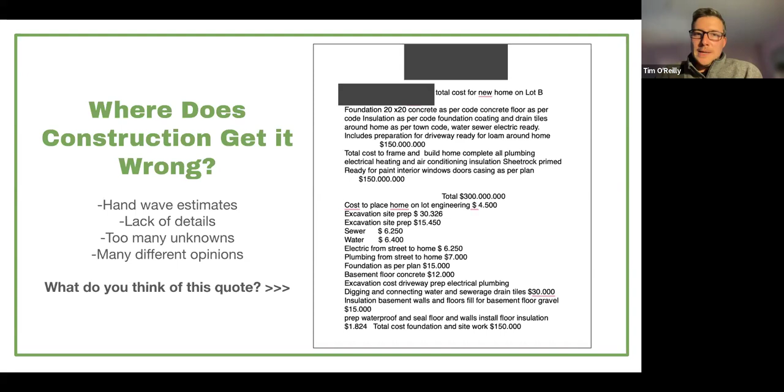So our goal overall is to correct some of these wrongs, to have our team come out and do a site visit, our engineering team reviews it, our design team reviews it, and we lean on our experience of building close to 50 homes at this point, to get you a report with detailed information you can use to go out there with confidence and figure out if an ADU or small home build is right for you. Yeah, and it's not only that, but it's catered to each individual parcel of land - wherever it is you're looking to build, whatever it is you're looking to do, we cater these things to you. So exactly.

That's what's hard - you can know that ADUs are possible in your town, but that's missing the construction piece for your specific lot, your infrastructure, and your constraints of where you are and where you want that project to be. So that's our goal here, is to get you that quality information up front so you can make informed decisions.

We tell Jeff and I say this all the time: you're spending $600 on a feasibility study, and it's not binding. Our goal is that unbiased information, so you can take that to any construction professional and be informed about your property and have the path forward. It really does help you identify next steps.

So many different moving parts, so many different professionals involved in the construction project, but you'll be armed with the information to know how do I move forward, and maybe what are some unknowns I still need to tackle. You could basically move forward with that intel.

Jeff, you were saying you just had someone come back from July - they had their feasibility done in July, and now they're ready. Yep, that's another thing we're hoping to offer here - you get us on site, you get our team to review it. But whether you're ready to move right now, in 6 months, or in 24 months, that feasibility doesn't really expire as long as the utilities, infrastructure, and things remain the same.

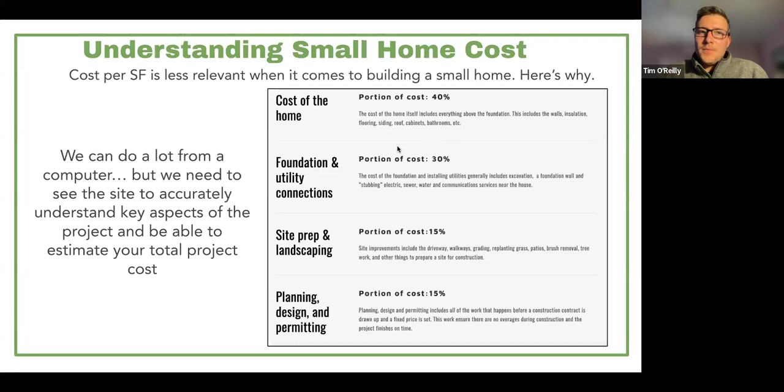We're doing a lot of work down on Cape Cod, so when we're thinking about utilities, it's often a septic, and that's going to cost a little more than maybe an in-town lot with town sewer. Likewise, some towns require more planning and permitting, which is more time consuming. They need additional documentation, which might be more expensive. You might be out in the sticks a bit, so you have more site prep and landscaping. All those pieces can vary, but generally we need to get our eyes on site to hone in and get better information there.

So earlier we said this is a 3-part process. The first part is before we even come out to the site, and that involves a lot of background research with our civil team and working with your small home advisor. Jeff and I do this all the time—we hear about people's goals and visions, their budget, what they're hoping to accomplish, and that helps us steer the conversation to start figuring out all these unknowns.

Jeff and I will go back and look at your specific address to figure out your zoning district and the exact rules for your property, governing setbacks, lot size, lot coverage. I could go on and on, but there's a lot of rules specific to your zoning district that we want to find out to give you good information.

We're then going to do a GIS map review. Every municipality—I pulled up a couple different brokers for those GIS maps—but we'd search your town and whatever GIS platform they use. We're going to see what kind of data is out there on your property, including any overlay districts or other relevant zoning, special wildlife corridors, or floodplains, anything we'd want to know and wrap our heads around before coming out to do a site visit.

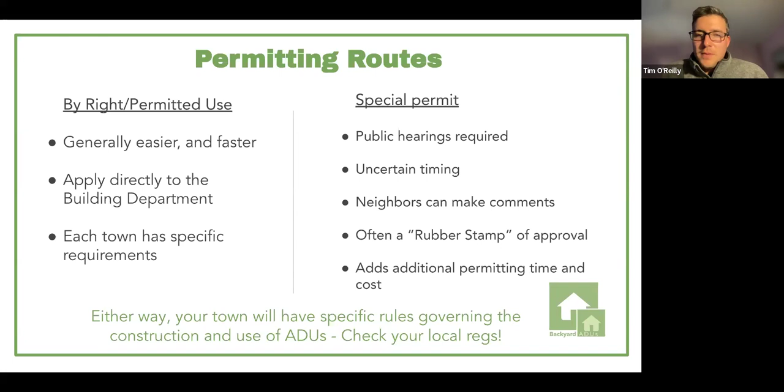But within that, something we need to identify upfront is whether there's any additional permitting that might be needed. We're doing a lot of work on Cape Cod, and we encountered an overlay district, or a few overlay districts, when we were looking at someone's property.

So they were dealing with, off the top of my head, I can't remember if this was the coastal ponds overlay, the wildlife corridors, or the wellhead protection districts. But it was important to know exactly where your property is here in Falmouth, because there might be additional permitting or rules to follow. These often pertain to septic, sometimes wells, but oftentimes open space as well. So we need to wrap our heads around as much as we can before we come out, so when we're on site assessing your property, we have all this information downloaded to get you good, accurate information.

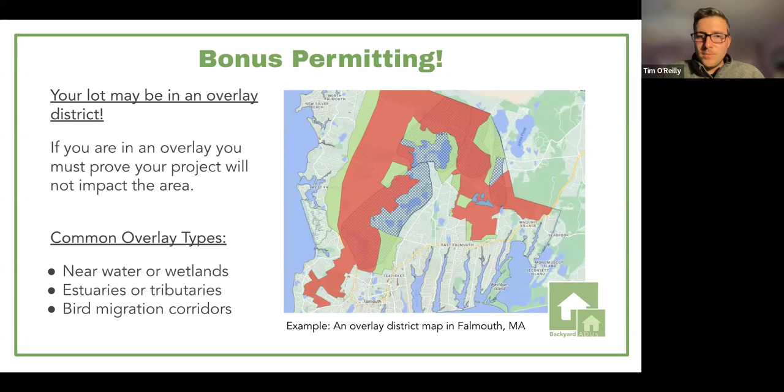So the site visit - part 2 is actually coming out to site. Jeff or myself will bring a car full of tools. We'll have the transit, a laser transit to shoot any grade differential. We're thinking in the back of our heads, what do we need to do for foundation work? Is it a flat lot? Is there a grade drop? Do we need to add more foundation material to make sure we have a nice level home?

What we're doing during this site visit is taking note of any existing structures or natural features - whether that be ledge, trees, or other natural factors to be involved with costing and the total project scope, as well as this one, they were thinking about doing an attachment. So what that attachment detail might be to the existing house. Some municipalities allow attached or detached. In Maine, after LD 2003 goes through, you should be allowed to do either.

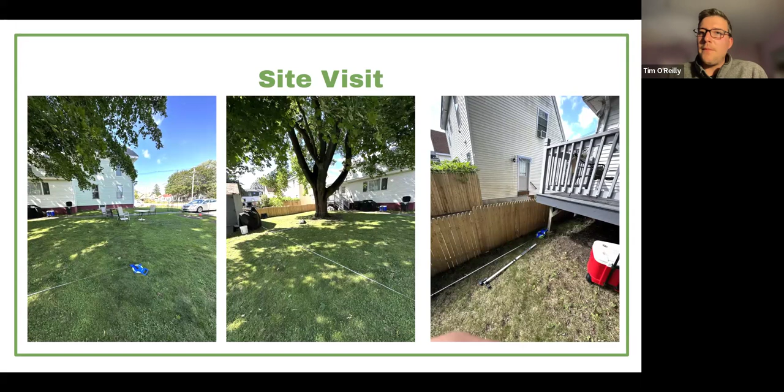Part of those requirements to meet a building permit is how are you getting this thing hooked up - water, sewer, electrical. Jeff and I are always looking out for this to see how it's going to work. So I alluded to it earlier, sewer and septic - we're thinking about that grade differential. Can we gravity feed from the new structure to whatever infrastructure is there? If you're on septic, what's your capacity - both the tank and the leaching field? How old is that system? We're doing brand new construction here, so we don't want to hook up to something that's going to have problems down the road if it can't handle that new construction.

And then especially in coastal areas where there's sensitive ecosystems, we see a lot of that on Cape Cod - are there any requirements for nitrogen reduction? We could have a whole series on this, and there are some great resources out there. So if this is something you're interested in, let me know - there are questions pertaining to this.

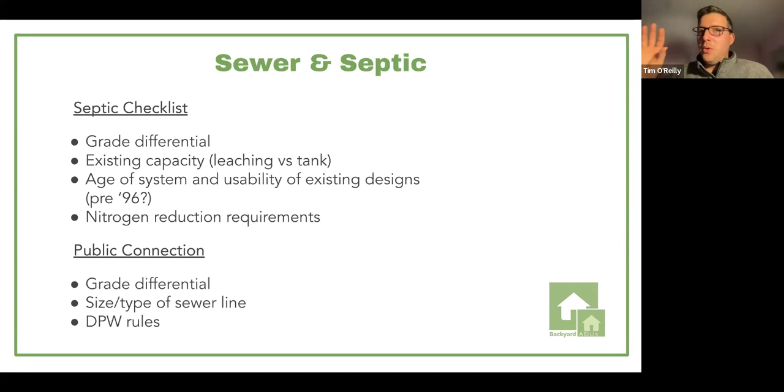Similarly with septic or town sewer, what's your grade differential? Where is that line, and what is it made out of? Cast iron, PVC, and how big is it? There are certain requirements we need to meet for plumbing code. And it'll really come down to what are the DPW's rules, how and where can that connection happen. So that's what we like to figure out on site, and then punch that into your report with any cost implications and how that connection is going to happen.

So we identified this at the feasibility study level. We said, hey, the feasibility of the ADU is possible. It is feasible, but you're going to need a new septic. Let's earmark a chunk of change, knowing that when you're thinking holistically about the whole project, you're going to need this piece of infrastructure.

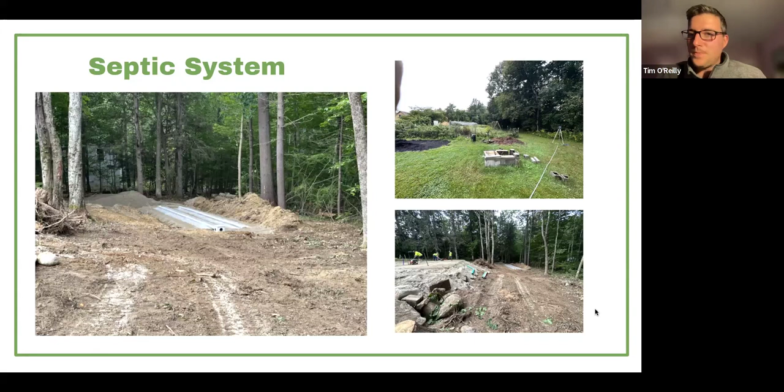Will you always need a separate septic?

Say that 10 times fast. The short answer is no, not always. It really does depend on what's in the ground.

This is a good example. This was a home I visited in Truro, a new build in 2018, and they're looking to add some space for their growing family. So I went in the basement and found their sewer pipe, figured out how deep it is leaving the house and where it's leaving the house. This was 4-inch PVC, so we knew we would have the green light to connect to it.

Then I went out in the yard and figured out, in this case, it was very easy with that snorkel there, where the leach field was. But the tank was near the house, and we made an informed decision for them: hey, this is the best route to connect to. So it's site by site dependent on what's there and what the topography is, to know whether we can connect to what's there or if new infrastructure is needed.

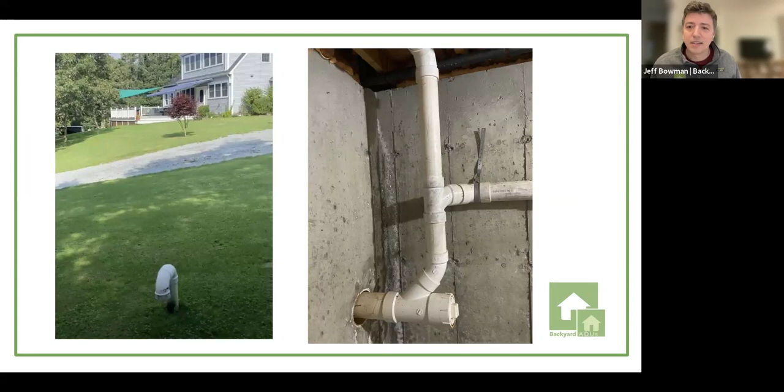To go a little deeper on that, it depends on the existing age of the infrastructure and what the capacity is of the septic. Ideally there are town records, or the property owner has information regarding when and how big the septic was put in, let alone where. But given those circumstances, sometimes we can attach, and often do attach, to an existing septic system. Sometimes it is necessary to put in a new septic system, sometimes it's preferred. Age, capacity, those are usually the big drivers, and proximity.

Here in Massachusetts, all local health agents and departments are beholden to Title V rules and requirements. So it depends on what's there. Are we looking at bedrooms? Are we looking at total number of rooms? What's there, how old is it, how big's the tank, how big's the leach field?

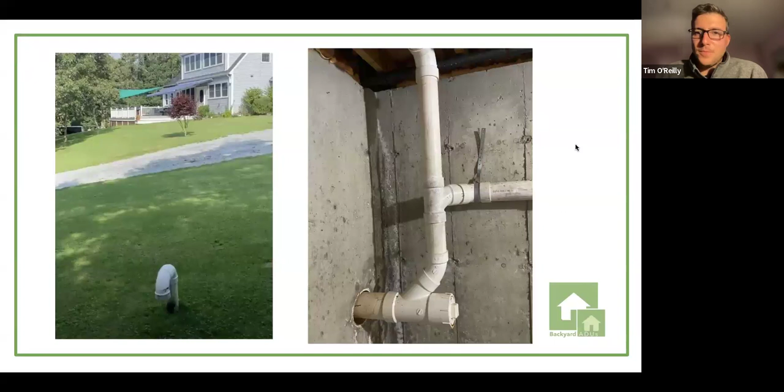As Jeff mentioned, this is about going and finding the records. I can't remember exactly where this one was, somewhere in Brewster. But what are the records? We can see as much as we can on site, in the basement and from the surface, but to figure out what's in the ground we need to go and pull those records and analyze them. So we do that as part of the feasibility. As you'll see in the example report coming up, we combine that with our site visit to see how and where an ADU might go, and that connection.

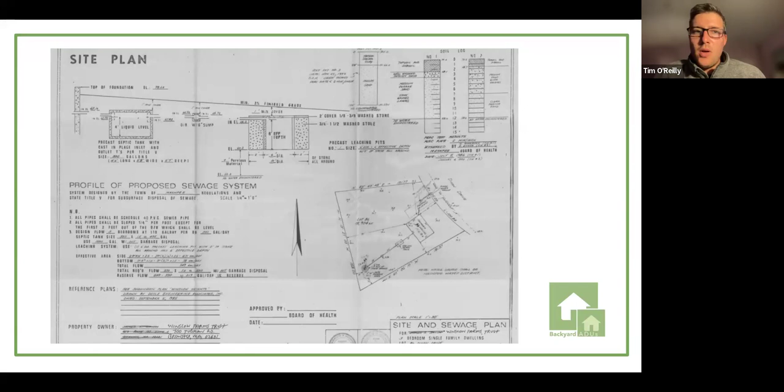Often if you're on a well, you may have a septic system. So we got to think about how far away those are, but also where is our proposed ADU going to be, and then try to figure out any information we can about that well. Oftentimes, if you're lucky, it's written or engraved on the underside of the cap on the head of that well. If you take that off gently, sometimes you can get good information, like this one was telling us the depth, the casing, and the refill rate.

So why is that helpful? We're adding new construction, new plumbing fixtures. We want to try to figure out if we need to add any additional pressure or filtration systems, or can we just connect to what's there and go from there.

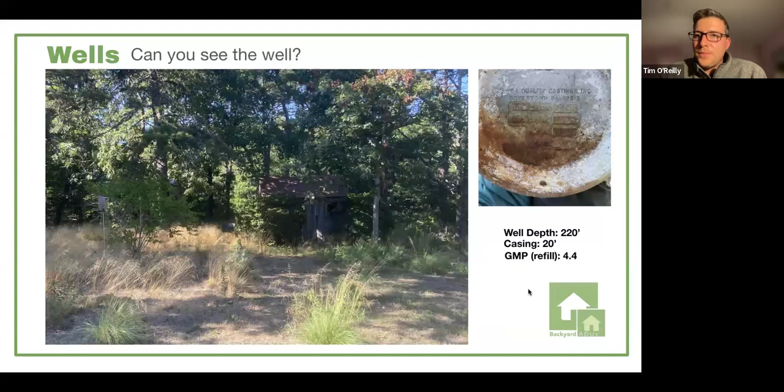If possible, if we're able to connect to the existing well, that's going to generally save on well drilling costs and associated expenses. It's generally going to be a cheaper way to go, to use the current infrastructure that's already there, than putting in new. But sometimes new is called for, and there's some flexibility in between.

I just worked on a project and we consulted with the well company, and we were able to add the ADU to the existing well. We just needed an extra holding tank because of their refill rate - to say, hey, we're going to have an extra, I can't remember if it was 50 gallons or whatever it was, in the main house, to know that we're going to have enough water, enough pressure to serve the ADU, which in this case was another 75 feet away. So it is site by site specific.

Public water - a lot of towns are on public water. So what are we looking for? What is the material from the street to the house before the meter? You can often see it sticking out of your basement. We're trying to figure out, can that service line bring enough water to the main house so that when we hook up to the ADU, we'll be okay.

Similarly, it'll often reduce to the meter. So what is that meter size? You'll see 5/8 meters, sometimes you'll see a 3/4 inch meter. But what's coming out of the ground? How big is your meter? Basically, a good general rule is, if you're bigger than 3/4 inch copper, you should be good to go.

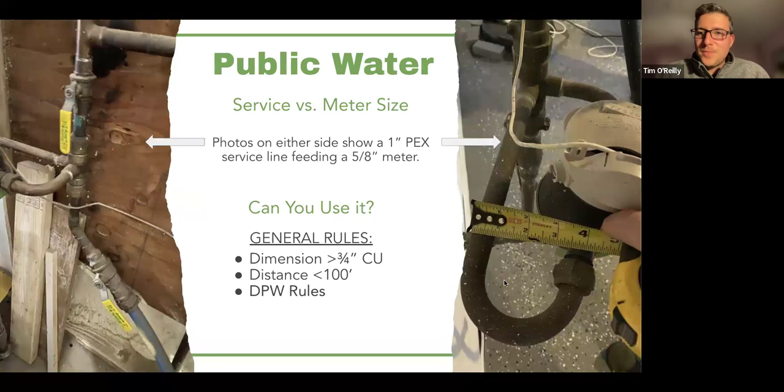All right, the last utility here is electric. We're building all electric homes, so power is a big item. We need to figure out where the power is and how much is there. For our new homes, we're looking for 200 amps - for us, that's the gold standard. We're running heat pumps, electric hot water, electric appliances, not to mention your lights. So we want to make sure we have enough juice for your project.

As part of that feasibility, we need to figure out what's there - how many amps is your current panel, and how are you using that? I was at a feasibility today, and they had a hot tub, a Tesla charger, heat pumps - they were maxed out. We cannot pull any more power from that panel. So as we approach this feasibility study, we're going to make sure that whatever avenue we propose gets enough power to that ADU. So what we're often doing is adding a second service.

So the main house has its service, and we're proposing a secondary service. So we're not touching the existing house, but that's not always the case. In some instances, it might make sense to upgrade the main house, whether that's from 100 to 200 amps, or 200 to 400 amps. There is some nuance there, but ultimately, when we come and do that site visit and have our engineering team review it, we're making sure that there's going to be enough power for the new unit and that we're not going to disrupt the existing house.

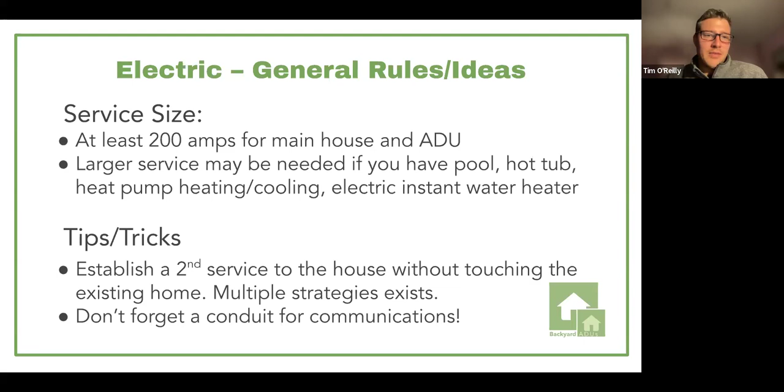Yeah, I see a lot of variation with power, and at least in Maine, there's a lot of different scenarios. I'm going from raw land out in rural Maine to somewhere on Peaks Island, to all over the place. So this is something that we take pretty seriously, and we find out what is there and what the best path forward would be, given your particular circumstance, and it varies quite a bit.

And it's a little bit more tricky depending on who you get your power from. It's not always easy to access the field engineer or the person who's making the call on exactly how that's going to get hooked up. So we've built enough of these now in so many municipalities, dealing with Eversource, CMP, National Grid, or there are a handful of towns, at least here in Massachusetts, that have their own power. But we know the lay of the land and what is possible.

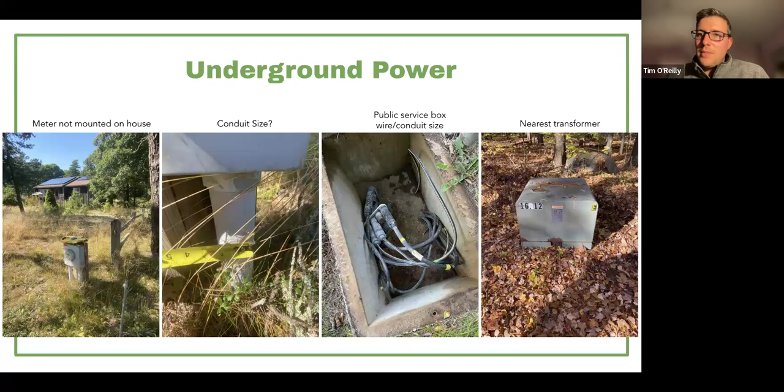So underground power, we see that a lot, especially on Cape. We're trying to figure out where's the meter, how big's the conduit, how big of a wire, how many amps can we run through that conduit. Where is it? Is the transformer right here - that's a source of a lot more power - or is it a public service box? And do we need to upgrade power between a transformer and a box in a house, or just a box in a house? We're trying to get our eyes on everything that's there so we can make an informed decision on how to get power to the ADU.

Part of the overhead connections as well is the site constraints. So since we build modular, we get the housing components shipped in, and then we have a crane, and we have to figure out, part of the feasibility study is also the logistics of how do we balance around what the current existing infrastructure is, and overhead power can often be a pretty large factor in that.

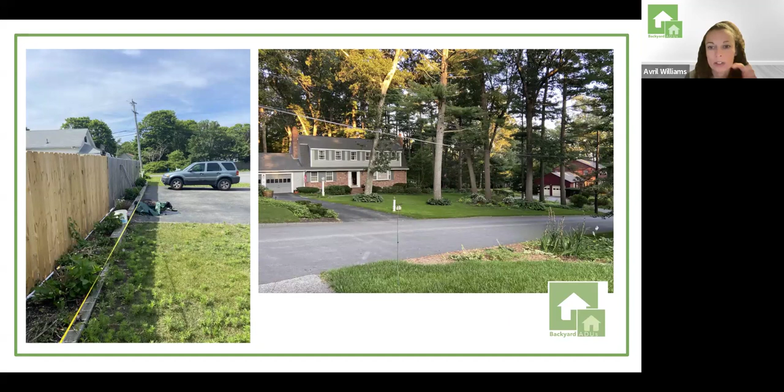So it sounds like, going off the information from the question, one of the follow-ups from a feasibility might be just that - saying, hey, this is the buildable area, we're in your budget, the next step would be let's get the surveyor lined up with the septic designer and take that next step. So that's good for everyone to know too - the feasibility study also includes the next steps to follow if this is something you're wanting to do. It's kind of like the first step that then sends you into the next few steps if you want to follow through. And at each step we're talking about with these utilities, we're trying to capture all the knowns and guide you in the right way. But sometimes there are these other tail pieces that say, hey, this is that nugget of information we need to finalize - let's go do it.

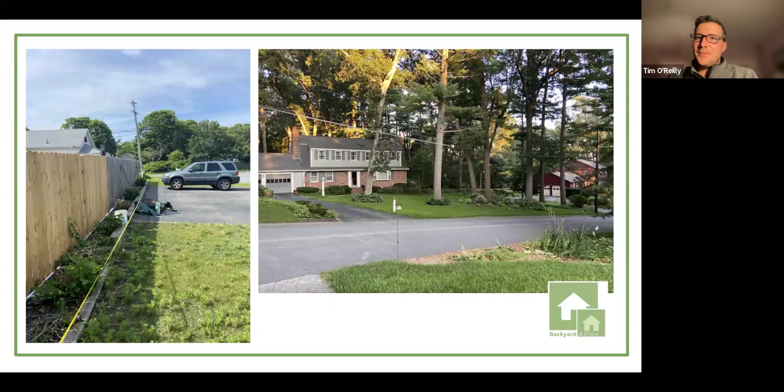And do we ever navigate with someone who's looking to do this on a property they're considering buying but haven't bought yet? Absolutely. I was on the phone last night for close to an hour helping some folks think about where they want to live next and what piece of land to buy. So I would recommend reaching out to me or Jeff, we'll be happy to chat with you.

But in short, you want to find where you want to live first - make sure it's the right town, or near family, or whatever your big parameters are. And then what we do recommend is treat this feasibility like you would a home inspection if you were buying a home, but for that raw land. Let's come out and see what clearing, what site prep, what site access, and about these other utilities - perc tests, well, power - to again give you a ballpark budget for the entire build. You can then also know what the land cost is going to be and see if the two together make sense for your budget and for your goals.

And our other questions are more about what's included that we haven't covered yet in the feasibility. So you can go over the rest of that - pricing and stuff like that.

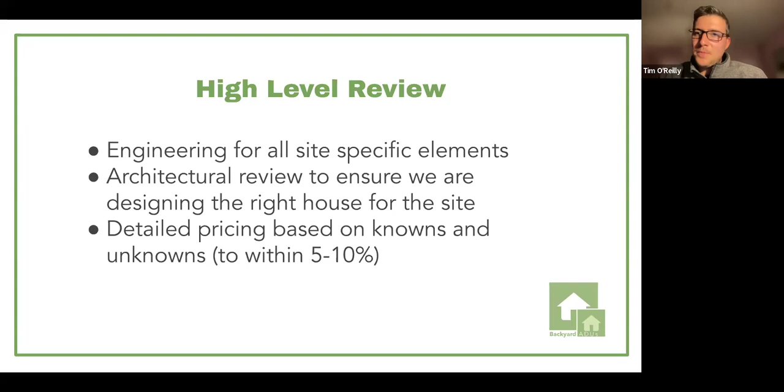Great. So when Jeff and I do the pre-work along with our civil department, we come and do the site work, the site visit as step 2. And before we get to step 3 and get you those deliverables, it goes through our review process. So our engineering team is going to look over the entire build with their high-level construction lens. Our design team looks at it as well, saying, hey, what can we build here? Does it make sense? Are we building the right house for the site and for you to fit your goals? And then together with those reviews, it all goes back to our pricing to know that we're really honed in. We try to be within 5 or 10% on that project cost output, so that you can again make that informed decision to say, hey, this pricing works for me, this project works for me, and here are my next steps.

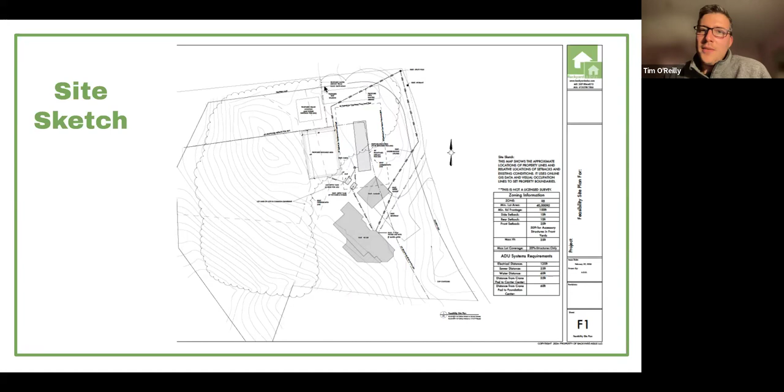And then some comments. So in this case, we saw in this sketch, they were going to clear a new driveway, so we wanted to factor that into the total project cost. In site work, utilities in this case, for the underground power, we knew that National Grid was going to charge them for the wire since we were going underground, so it was going to cost a bit more. In this case, they wanted a bigger ADU than one of our models, so we added some additional size to meet their goals. They had a little bit of extra interior and exterior work costs.

And then we knew in this case in Falmouth on Cape that there was going to be some additional permitting and water department fees. So in total on their property, the ADU of their size that they wanted, we knew was going to be within 5 or 10% of 322. So along with their sketch and along with this 15-page report, they had all the information and our best bid to build their project. So she walked away.

We had a Zoom meeting actually just the other day. We reviewed the whole thing together and we went over all of her requirements and what was possible. And so she had a couple questions for me about the electrical connection and the septic connection. But she left very informed.

And in her case, she had a couple follow-up questions she had with her family to see if this was going to be the right project for her. But she knows that if they decide yes, here's exactly how that project is going to go. And hopefully, right on target with budget.

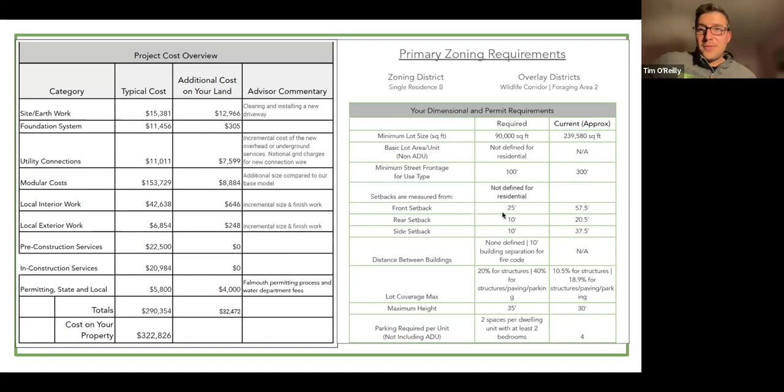And so all of this, that entire report and the site sketch, that's all for the $600. Yep, exactly. And it honestly really just covers our time. We take a lot of time and pride to go and get all this information and compile that report and then have everyone on our team look at it.

So I included this image on the right too, because we do get asked all the time, what's possible on my property. And that's where we do that pre-review, but then we do need to go on site and actually see, let's measure, what are your current setbacks? What are your current lot coverages? What are things on site? Because again, we can only do so much from the computer. But we want to get you that information to know, hey, are there any red flags? Are there any things that might hinder this project, or what their costs might be?

This question was asked a lot earlier, but it's saying, does your feasibility study include a breakdown of pre-development costs that would have to be owner funded prior to obtaining financing? Yeah, that's a great question. So we're looking at the whole project cost. So we're going to try to include all those pieces.

Any septic design work, land clearing, all that stuff, we would try to capture in the cost on your property. You could then divide some of those out and say, I'm going to remove my old shed, or take down these trees before you get rolling on this project.

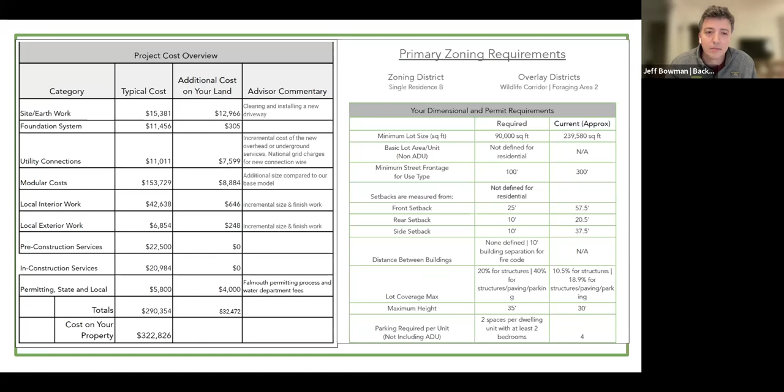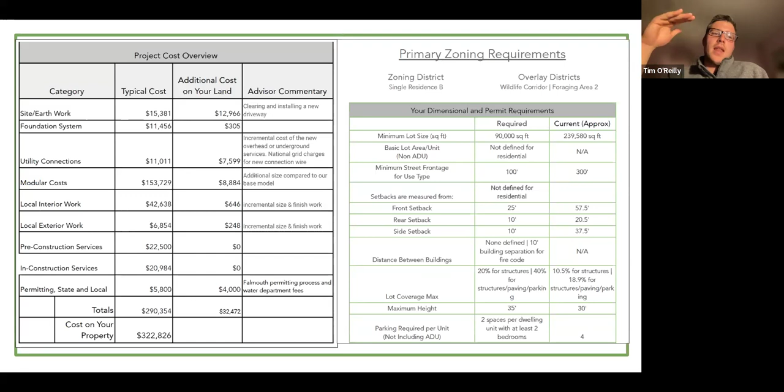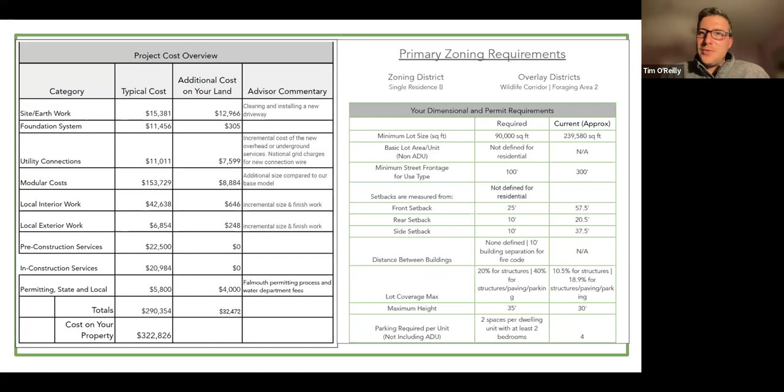If you wanted to do that before you got financing, if you wanted to work on certain aspects of the total project cost, like certain site work items, that's definitely feasible and okay. On the back end, if there are any items, like if you wanted to take on your own painting, we could take that out of the total project cost. And then if you go get financing for that total project cost, but take on any scope after that, there is sort of a gray area with the bank on how much you could pull out. But Jeff and I would work with you on that to get you where you want to be.

We do have another event in two weeks too, our Design 101 seminar, where we talk a lot about design and cost. I'm prefacing with that because we did get a question, so I'm telling Tim or Jeff to give the shortest answer possible: on average, how much does it cost per square foot to build an ADU? The common square foot question. We do go over it a little more in depth in a couple of weeks too.

Absolutely, yep. You want to take that one, Jeff? Yeah, I'll give it a stab. Quick and dirty, price per square foot is a hard rubric to apply to ADUs, especially the way that we build, because it's not just the total cost per square foot of what your house would be, but for the entirety of the project, and there's often a lot of nuance to everybody's property and what the scope is that we're taking on. So it's a hard rubric to apply to ADUs, the cost per square foot.

It also depends on what your goal is with the ADU, whether it's short-term rental or multi-generational living, those kinds of factors. Since we're building it so small, it does tend to look more inflated than what some single family homes could be on the market. And a good example of that is fixed costs to power the building. Ultimately, there are fixed costs that don't change.